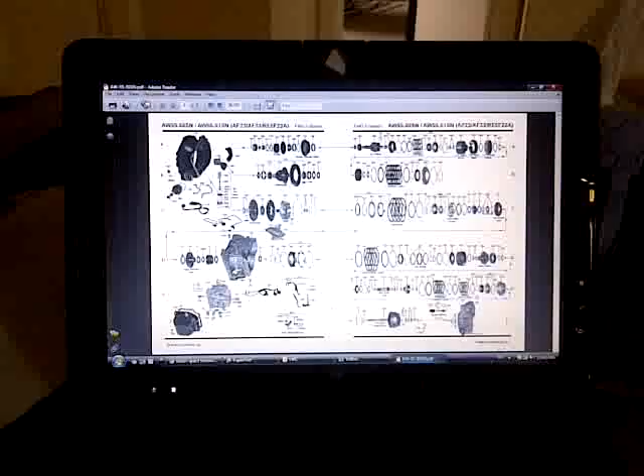This episode series here will be an automotive series. So anyways,

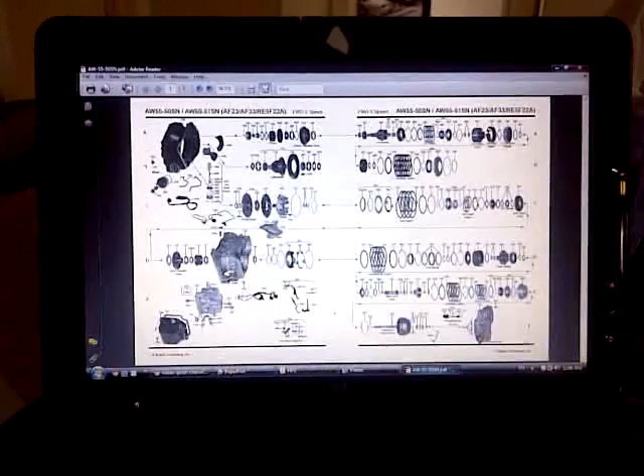Working on the minivan with the good old code reader I got. It turns out that one of the solenoids has gone bad here, and so I found this wonderful company here. They provide a diagram of the transmission here, and also offer selling the solenoid itself instead of the whole valve body, which costs a lot of money.

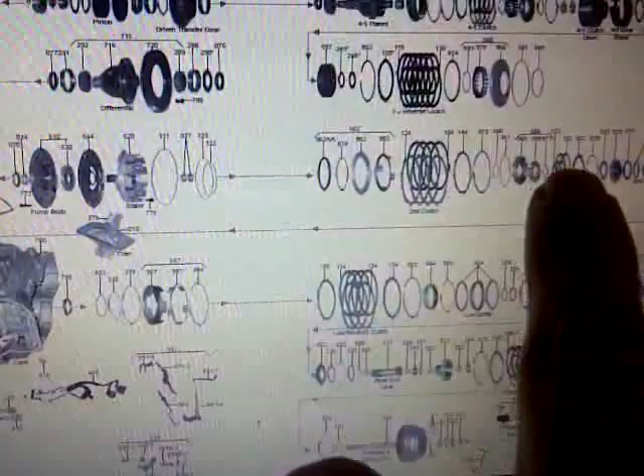And thanks to this, I found out where the transmission filter is. That's the transmission filter right there. And according to this diagram, the way it goes in, it looks like it goes somewhere inside this, within the body of the transmission. So that's probably why I don't see a lot of people replacing their filters on here.

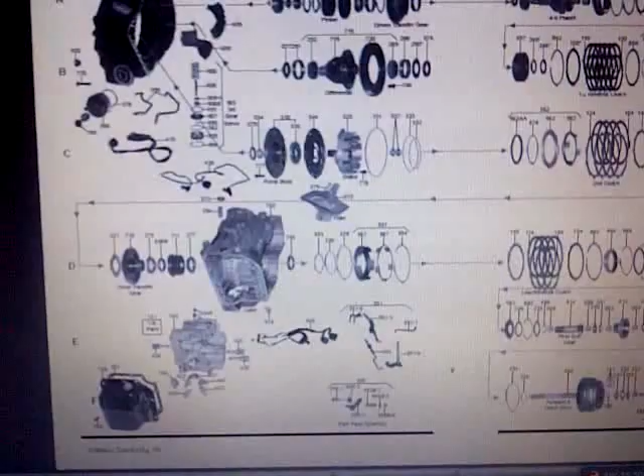Anyways, there's a solenoid right there. Mine's number 410, I think, 440. And I'm just replacing that one. I might have to replace all of them, but I'm just gonna give this a shot and see how it goes.

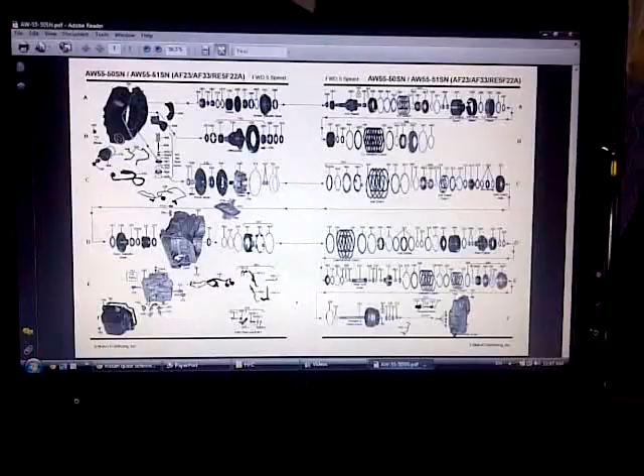Hopefully it'll start driving. And I did find the camshaft, or the crankshaft position sensor. It doesn't say anywhere where it is, but I'll show you when I get down there. Anyways, let's take a crack at it, shall we?

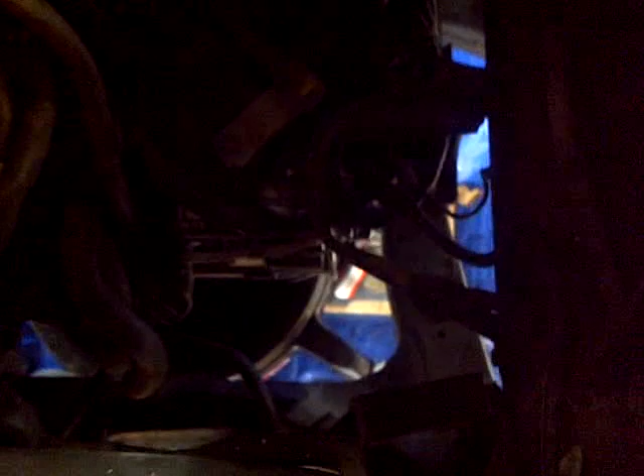All right, here we are again, back in the garage, and of course, let's see if I can illuminate things here. Okay, took the cover off the valve body cover. There's the guts and everything. Of course, took out the batteries and everything.

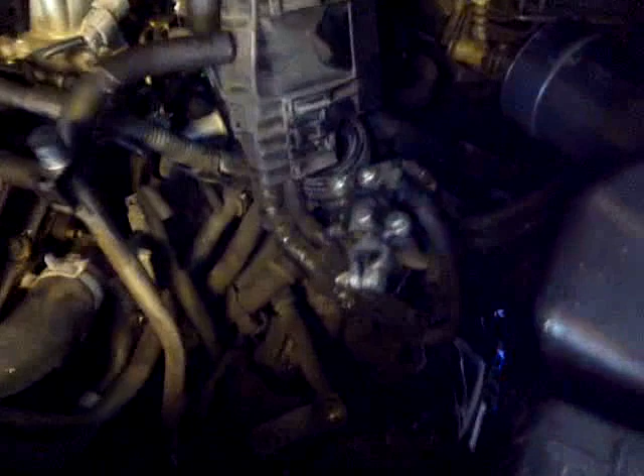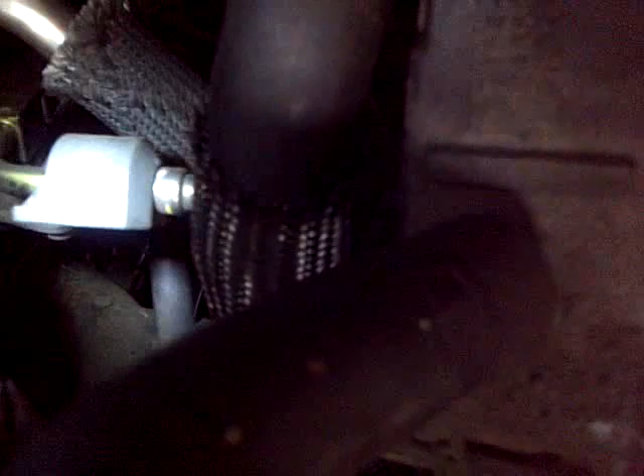And man, I was pulling my hair last night trying to find the sensors. That little green, you see that green out? That's the cam sensor, one on the left side, and there's another one. Let me see if I can find it. There it is, if you can see that little green, it's hard to see. That's the other cam sensor. You see that little green plastic piece. So I found the cam sensors.

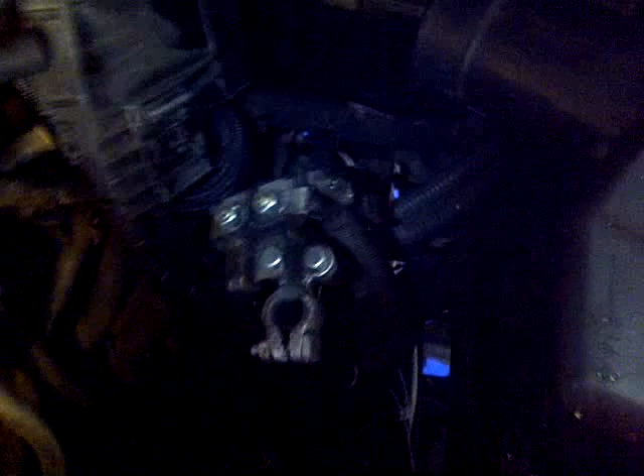They're on top, but man, I had the hardest time finding the crankshaft position sensor. I was digging through back here thinking it was back here somewhere, but eventually what I decided to do was just follow all the wires, where they all go. It's an electronic sensor, so it's got to be connected electronically anyway. So I kind of followed the wires around, and none of the plugs look like the sensor that I've seen pictures of, other than, and of course the crankshaft sensor would most likely be on the bottom.

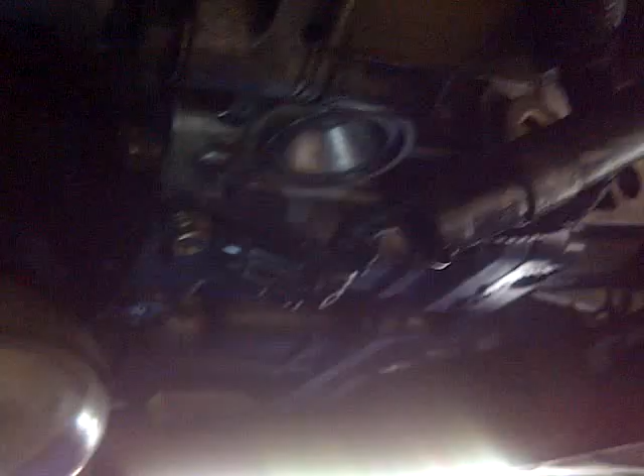And I think I found it. I believe that right there would be the sensor. I unplugged it, I haven't taken it out, but I unplugged it, and it has the right amount of pins. It's the right shape. It's on the bottom, where, of course, the crankshaft would most likely be, or part of the crankshaft. So this made the most sense. So I just concluded that this is the sensor right here, and so there it is.

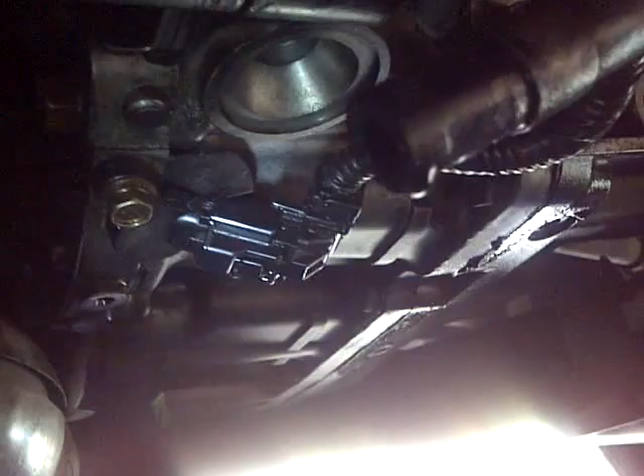And it was covered, you know, it wasn't covered that much. It was covered by this thing here, and it was just a bolt in a hole. That's all it was. Let's see if I can - I'm getting my hands dirty. Oh no, yeah, it was covered like this. So that's how it was covered. It was covered like that.

So I'm hoping that that is the sensor. It makes sense. I mean, I just tried to look at the wiring of this whole thing, and it's got to be wired somehow. I looked at the front over here, and nothing made sense, and that's the only one that makes sense.

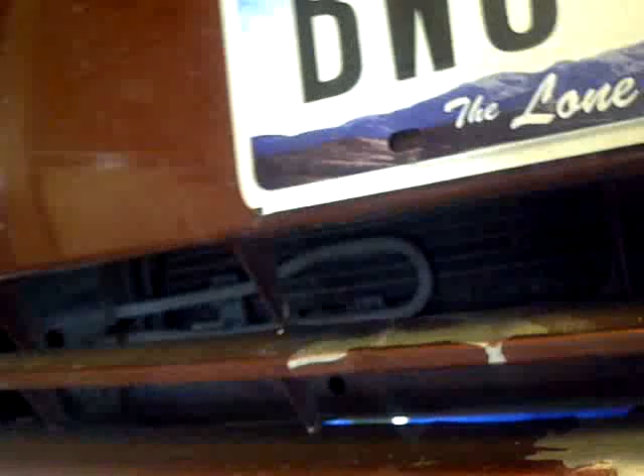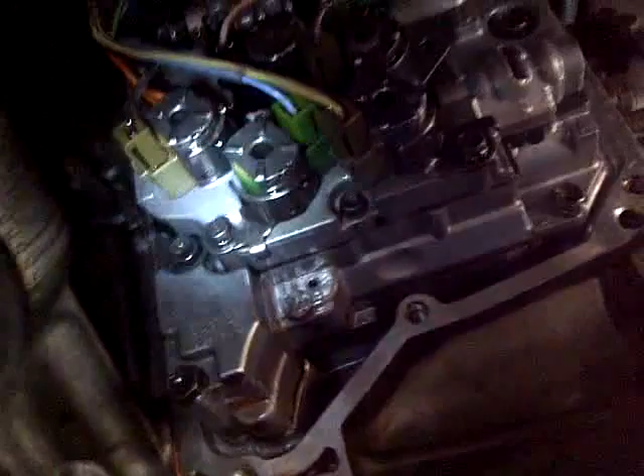Anyways, let's see here. What I got. Okay. So there it is, and it's this one in particular. This one right here, that's the one in particular. Let's see.

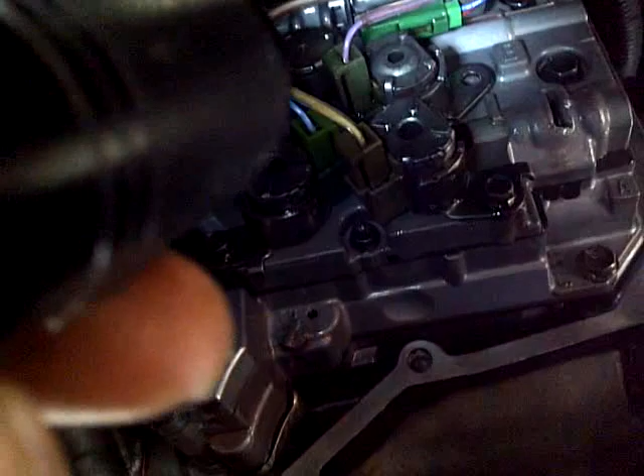And I've already unscrewed it and took out the wiring, or pulled the wiring out. Just kind of put it back just to show you what position it's in, and it's just a simple bolt. As you can see, I already took it out. There you go, there it is.

And I might have to replace all of the solenoids, but hopefully I don't really have to. But considering the other option was to buy the whole valve body just for one bad solenoid, it's kind of ridiculous. But I'll try to take it out here to show you. There it is. So I'm not sure what's wrong with it per se.

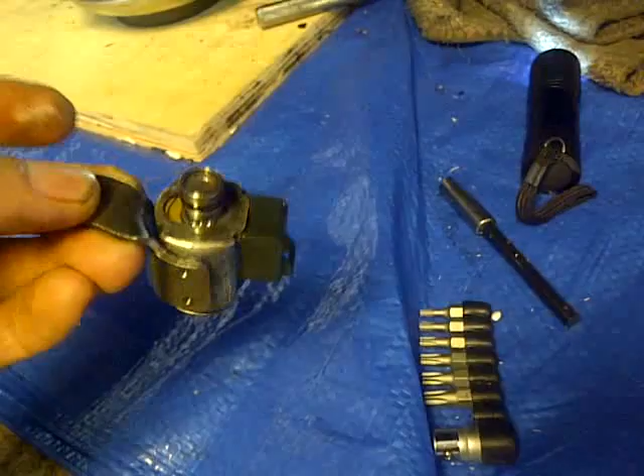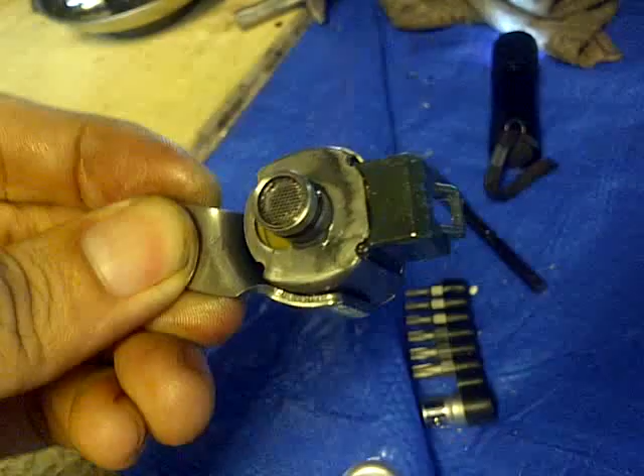But I did notice that there is a filter of some sort right here. It's almost identical, same size. And this is the replacement part, which is a little different because, if I noticed here, there's no filter in here. I don't know if that's going to make a difference, but it looks like you simply plug it back on, plug the electronics back onto it, and bolt it right back on. Hopefully this will get the transmission going again.

Of course, this is just a little, you know, with shipping and everything, it's just $40. It's worth a shot instead of paying a couple thousand dollars or $500 or $600 for a new transmission. I'll give this a shot. So it seems to be relatively easy to do.

And then of course go ahead and also replace the sensor while I'm down here. Already drained out the transmission fluid, which is alright. I'll just have to put more back in, but we'll give that a shot and see how it works. So, oh man, what a day. Oh, and you've seen my little repair tap onto this here. Hopefully I'll keep you all up to date and see how it goes. Thanks.

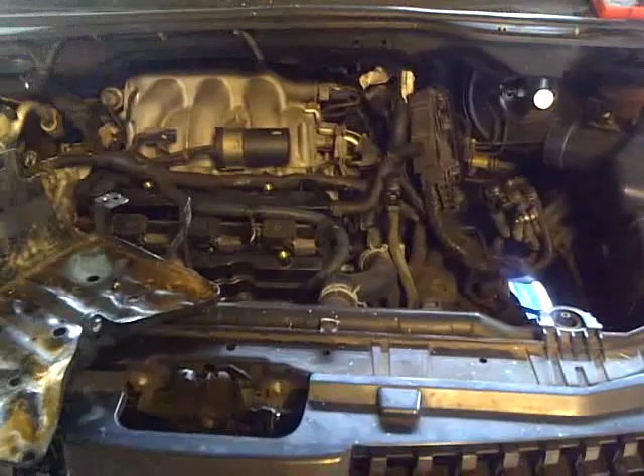Alright everyone, it was a really simple, easy step to put in the new solenoid. As you can see, the new one right there compared to the older one here. Hopefully this will remedy the situation for now. I might have to go ahead and replace all of them. If one's gone bad, they seem to all go bad, but we'll see how it goes. I just want to see how it does before I put any more money into this thing. I might just have to get a whole new transmission. Anyways, hopefully not, because they're kind of expensive.

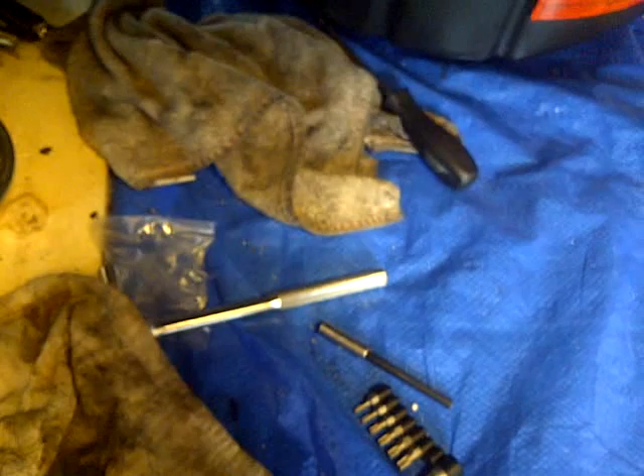Yeah, it just goes right back in. You plug in the electronics, the wiring, put the bolt back on, and it just goes right in the hole. So we'll see how it performs now. Of course, I still gotta- where is it? Oh yeah, right there. There it is. I still gotta change the sensor here, so not quite done yet. Gotta go to the store and get that, probably get some more transmission fluid as well. So there's the update. Oh boy, thanks a lot everyone, keep you all posted.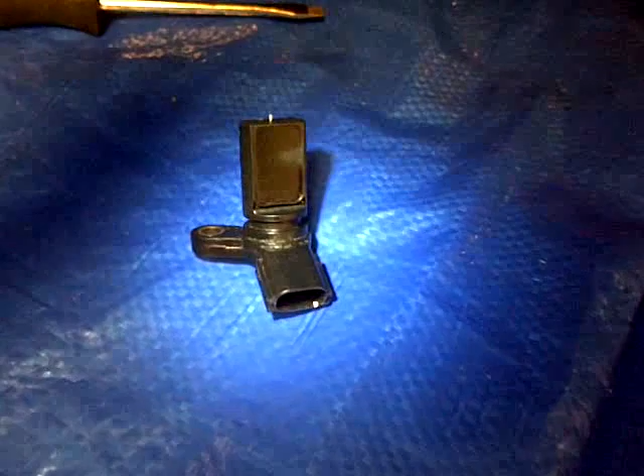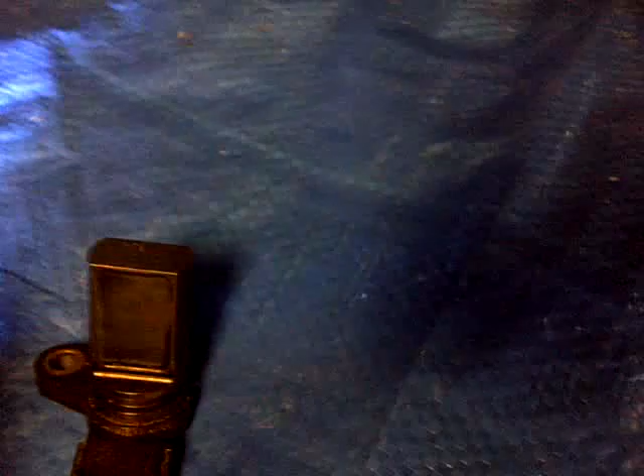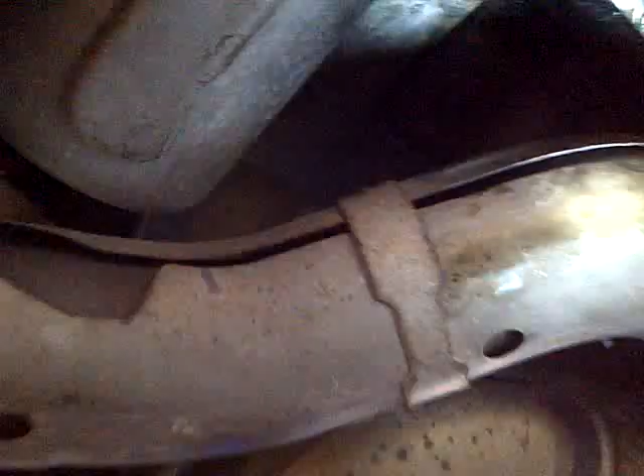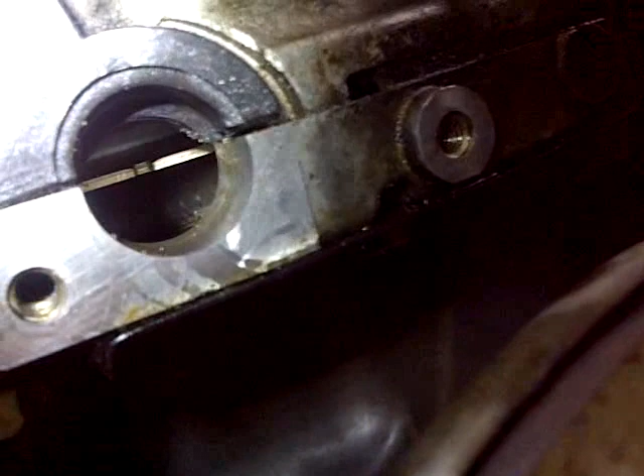Alright everyone, I'm back here, and that's what I pulled out here. Looks like the right part, as far as I'm concerned. There's the 3 pins here, and let's see if I can show you where it came out of here. Right there, that's the hole right there. And you know, it looks like the right spot. I wonder if I could actually see the crankshaft from here. Oh yeah, I guess I can. I can see something, here I'll show you. Y'all can see that. I'm not sure if y'all can. There we go. And you can see that piece, looks like there's a wheel, some kind of wheel. So alright, I'm pretty sure that's the crankshaft there.

That's where it should go. So thankfully, it's right here up in the front, in the bottom, basically very close to where the- let me move this out of the way for you. Very close to the transmission plug. It's right there. So I've been having a hard time finding where this is. It's not like it's readily available, this information, so I had to follow all the wires. But anyways, let's go back to this thing here.

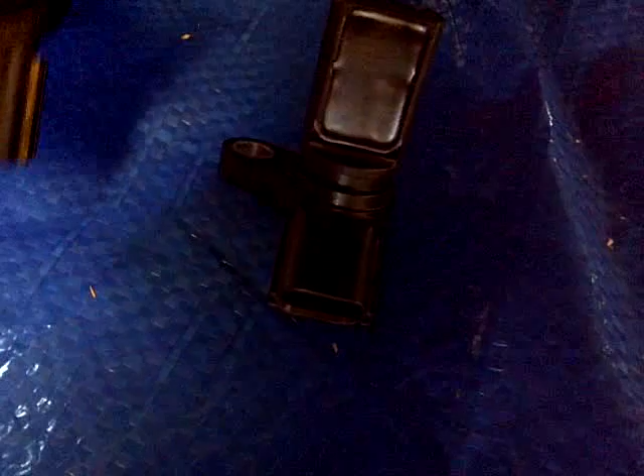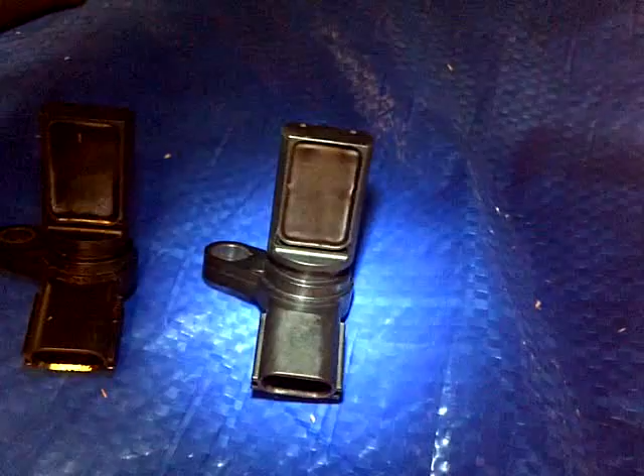So that's what I pulled out, and then here's the new one. This is the new one, and here's the old one. So they look like the same part. This is specifically when I looked up for crankshaft position sensor, this is what came up, and this is what I pulled out. So they match, just got to put it back in now. After that, I'm done.

And of course, I already put in the solenoid for this, so let's put it back together. I may do another flush out here. Last time I used this to flush out, but what I'm gonna do this time is let the fluid go in through the cooler and have it come out on this side here - see right there, that's what's dangling. So I'm gonna pull that more out and use that to flush out all the transmission here.

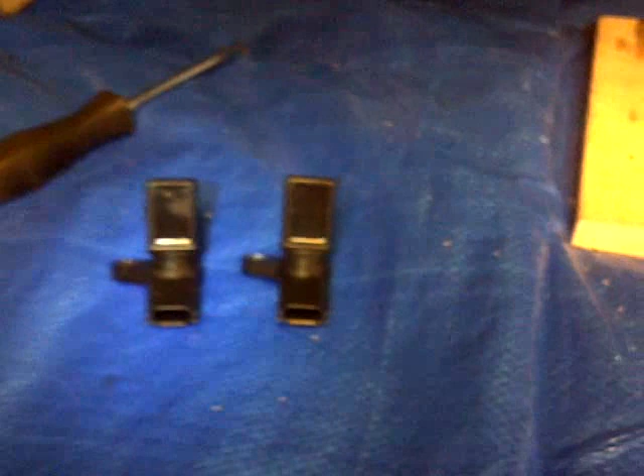Okay, sorry about that, accidentally pushed some buttons here. Basically just flush out anything that might have been - I'm sure there's nothing there by now, but just in case, flush out anything that was in the coolant or in the radiator. So, alright, there we go. I'll get this done and I'll let y'all know how I did. Alright, see ya.

Alright everyone, welcome back, and so far I'm done. Put everything back together, put the intake valve back together, put the battery back, put all the hoses and clamps back, everything that needs to go back where it goes. You know, sometimes I feel like being a mechanic is nothing more than taking things apart and putting it back together. Just got to figure out what you got to take out and what you got to put in. So anyways, that's kind of what it looks like up on top here. On the bottom, let's see here.

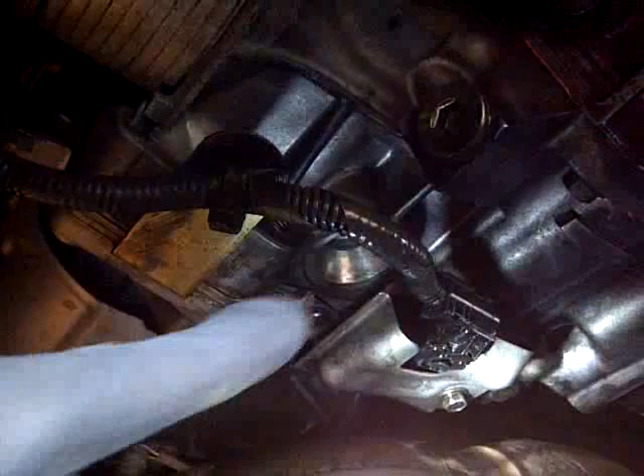I need a flashlight here. There we go. So there's the cover right here, which I believe is where the crankshaft position sensor is. Of course, right next to the drain plug of the transmission fluid. So there it is, I hope.

I hope it works. I'll put the valve body cover back on, and hopefully that will solve any issues I have. I haven't started it yet. Probably need to put some more transmission fluid in since I drained it. So that's kind of what it looks like on the bottom. Just gotta lower everything and clean up, which I pretty much almost did.

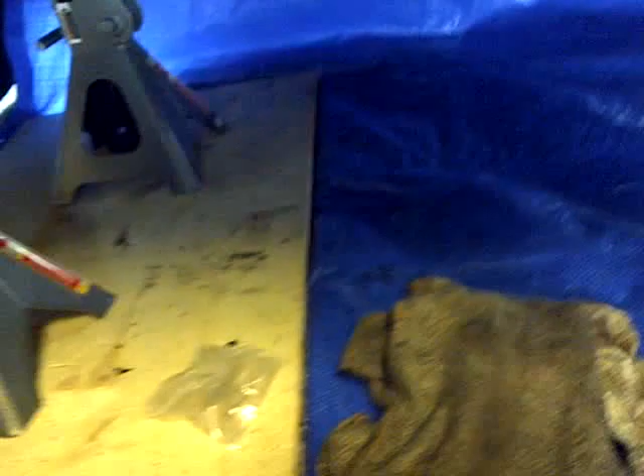And my little slash barbecue pit that I converted into a cart slash welding table, welding cart slash whatever, service cart.

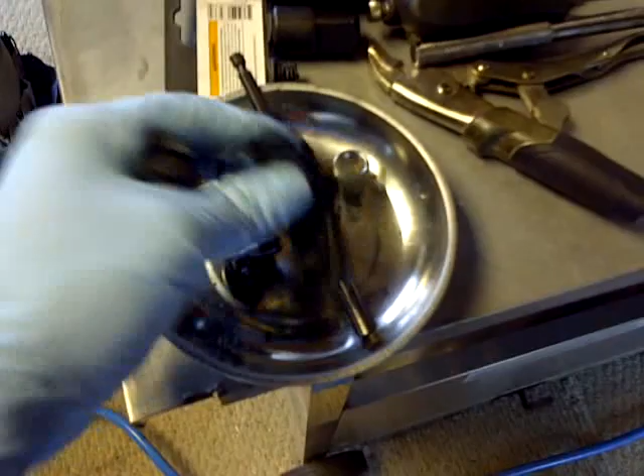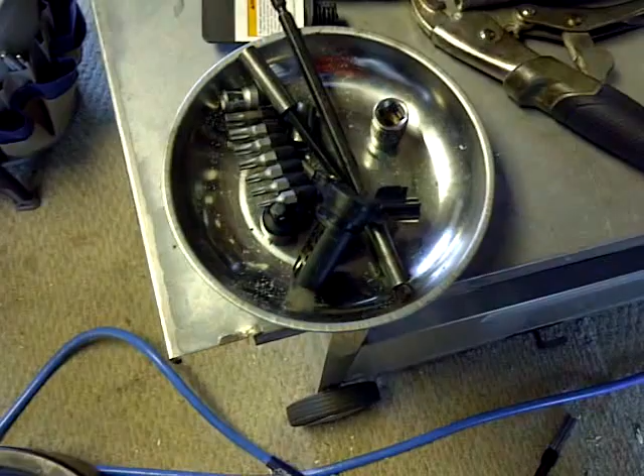So this was the old sensor, and that's pretty much what it looks like. Just like the new one looks just like this. So I hope that this is the right sensor. Let me see here. There we go. Okay, hope that was correct. According to the code reader, this was the problem. So hopefully I won't have to replace this for a very long time.

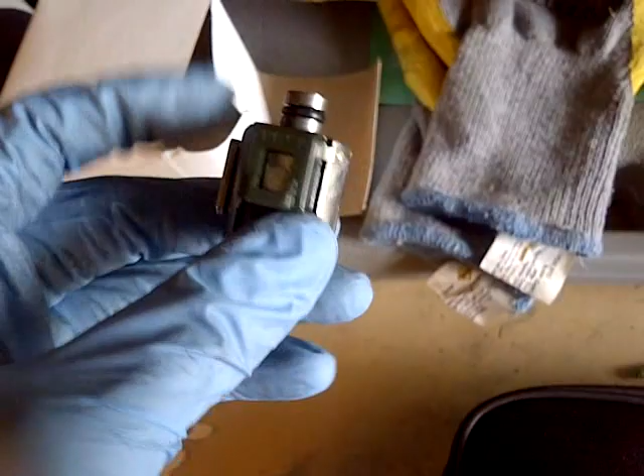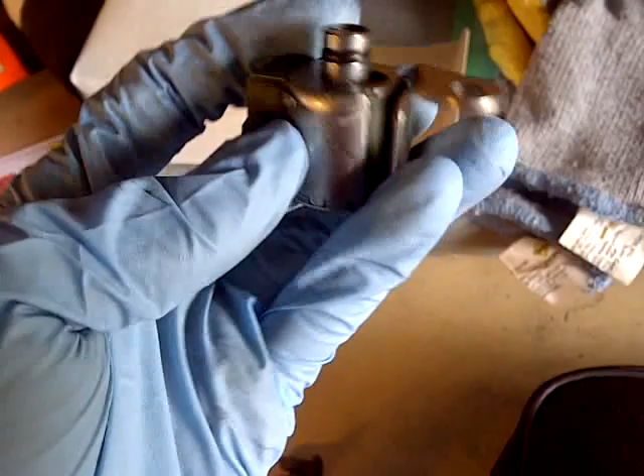And as for the solenoid, here's the old solenoid. Of course I showed you that before, but that's all it is. Kind of amazing, that's all it was. So anyways, hopefully that should solve that problem, maybe. I don't know.

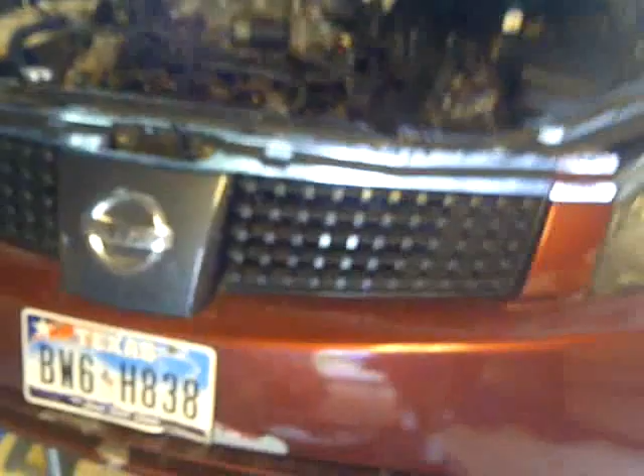I'm just tired of taking it to a mechanic, that's all. If they didn't charge so much I'd take it to them, but since they feel a need to maximize their earnings by excessively charging per customer, I wouldn't have to do this.

Anyways, I'll go and lower it down. Let's see what happens.

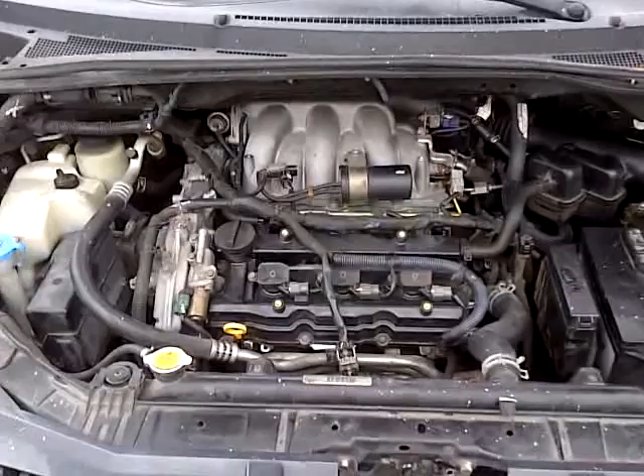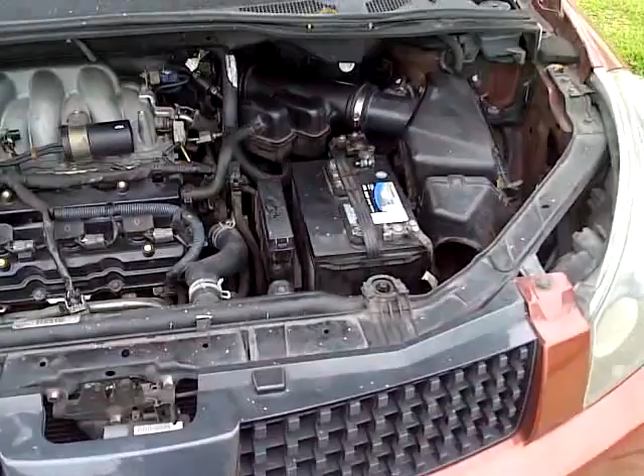Alright everyone, welcome back, and it's working. It's working like a charm. Turned the ignition, it started, it didn't stall anymore. Shifted it in reverse - it used to have a big clank noise when I did that. Now it's quiet on the shifting. Drove it around the block. It shifted, went in gear. Looks like everything is functioning again.

I better take that off before it starts causing me problems. Anyways, man, everything sounds good, looks good. Thank God, everything worked. So let's take a look on the inside here.

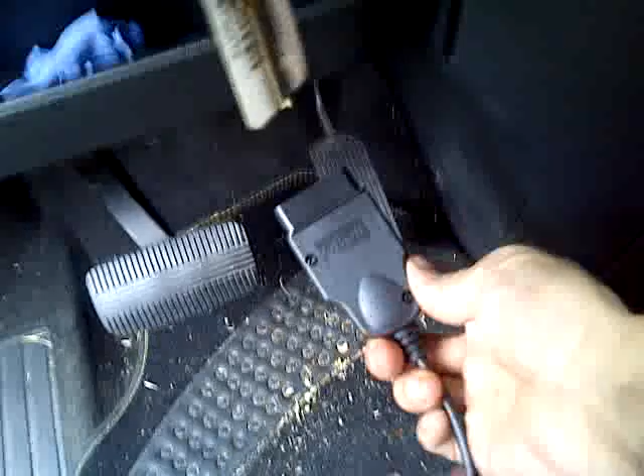Since I pulled the batteries, everything pretty much reset, so there's no engine light. So I'm going to go ahead and just put the - let's see, where is it? There it is, put the - oh, it's right here. Plug that in here. Let's see what - probably won't say anything. But here's a little run on the scanner.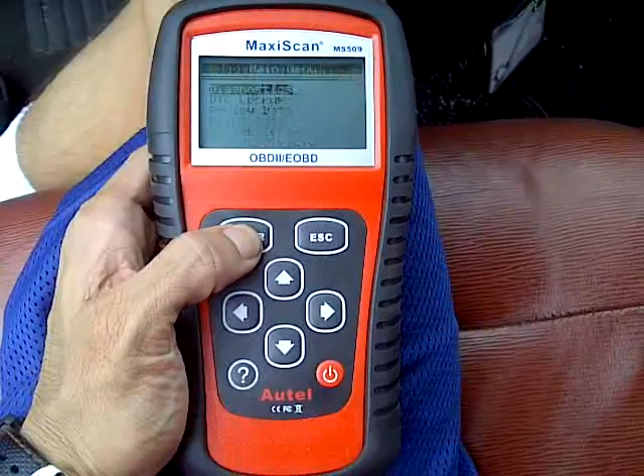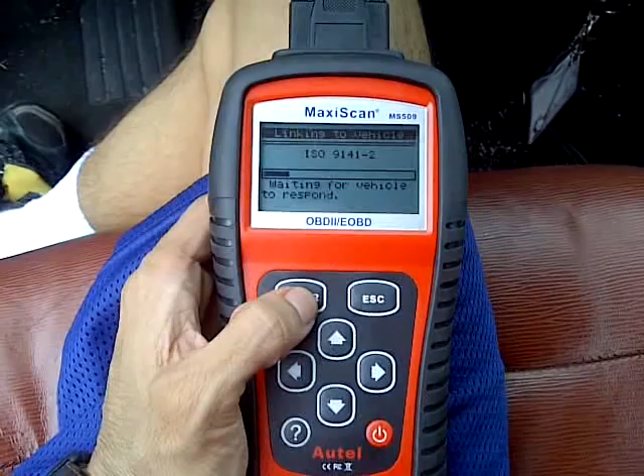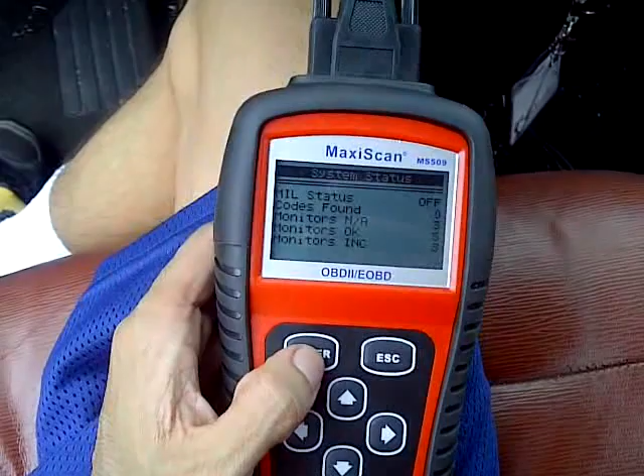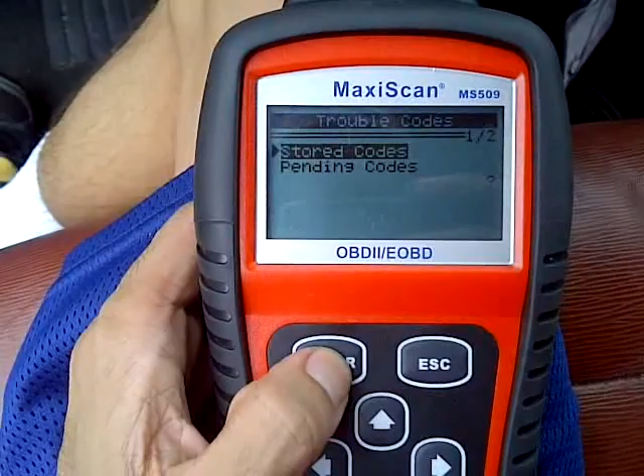Let's do a quick diagnostics on it. Let me see - erase previously stored data to save data from this test. Okay, yeah sure, why not, I'll just say yes. Alright, so of course everything's already been reset, just because of the fact I disconnected the battery. So nothing happened. No codes to read. Okay, and then no pending codes. Alright, no pending codes, cool.

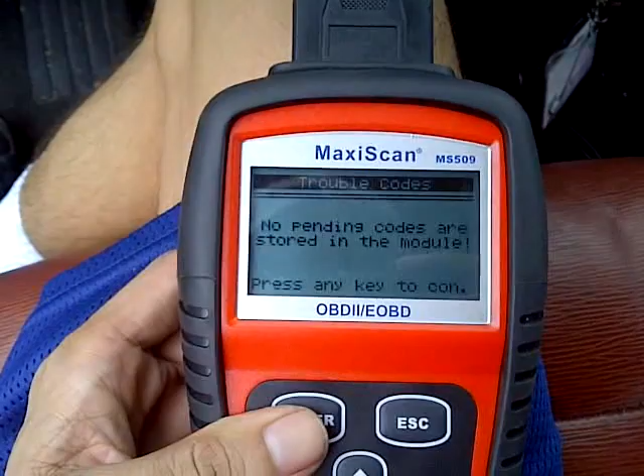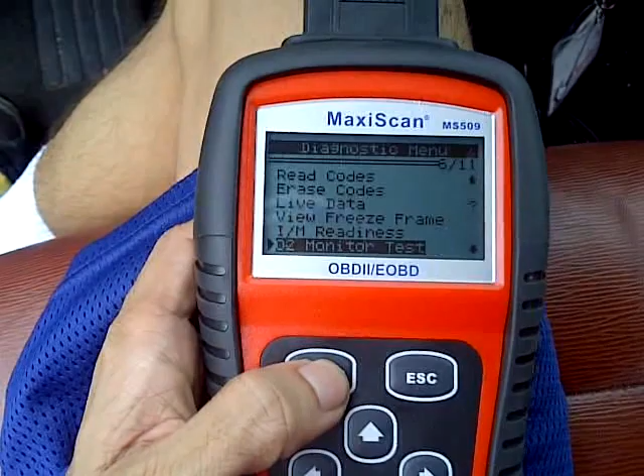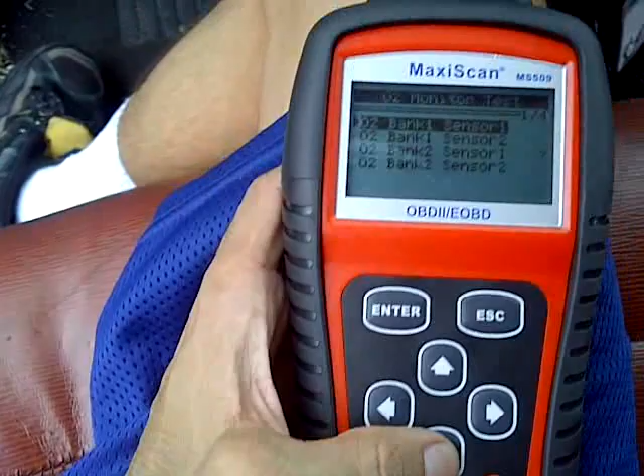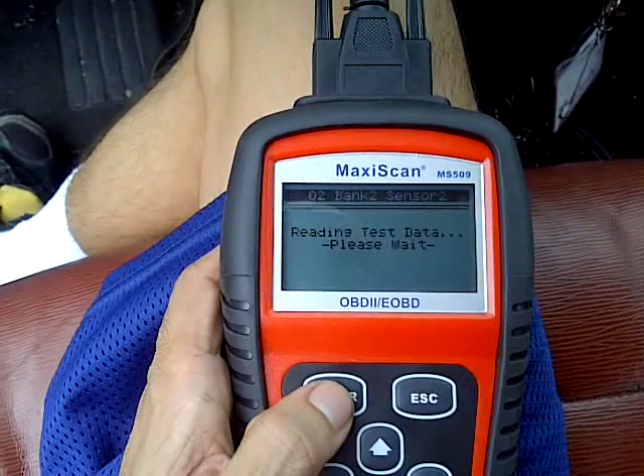So not much to show you here. I'm kind of curious here, O2 monitor test, we'll see what that is. Bank 1, sensor 1, alright we'll just take a look at it real quick. No, it's not supported. Huh. Is there anything supported here? Nope. Nope, I guess nothing's supported.

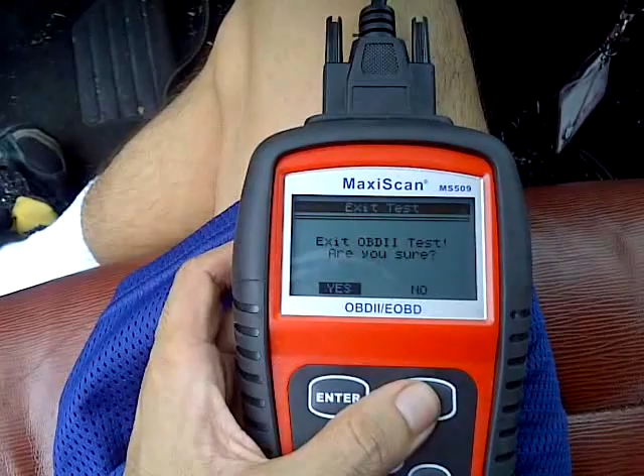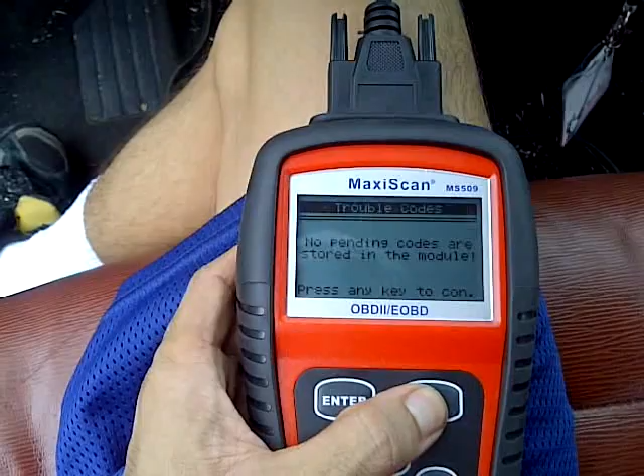Okay, well that makes it fun. Anyways, well nothing's coming up, so hooray. Let me see, review data, stored codes - no codes were stored in the module because I pretty much erased it. Pending codes, nope, I already did this, but nothing's coming up. Okay, alright, so I'm just letting it run, let the transmission fluid run through.

I'm gonna eventually shift the gears here. When I put it in reverse, it used to be a hard clunk, now it's just really quiet. I'm just trying to let the fluid go through each gear. Okay, that worked, great. Okay, that sounds good so far.

Alright, so I guess that one solenoid really prevented the other fluids from going through the other solenoids, and maybe that was the issue, because I know the low gear always worked. Everything else just seemed to stall. So let me turn it off and on, because one of the issues was the crankshaft position sensor was not working, so it always had a hard time starting up here, turning over. So let me try.

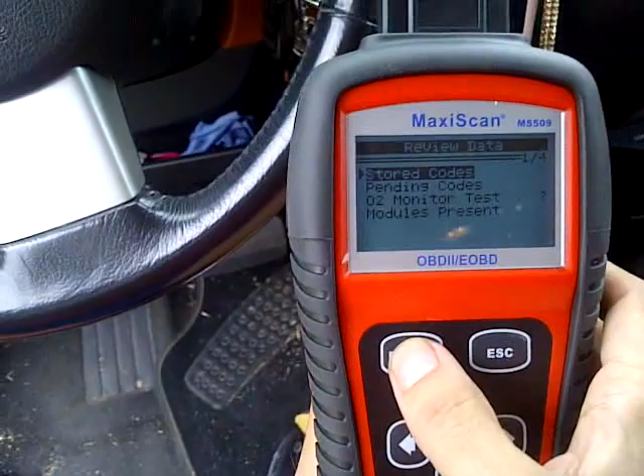Okay, so let's try this. Alright, starts up like a charm without any issues. Alright, cool, it looks like everything's working. No engine service light came on. I'm going to check again for any. Nope.

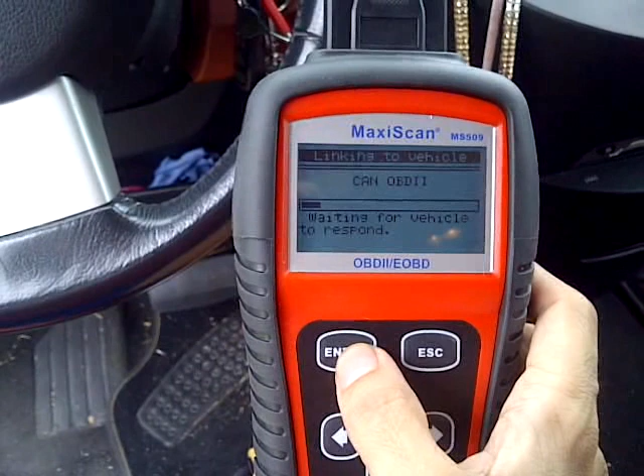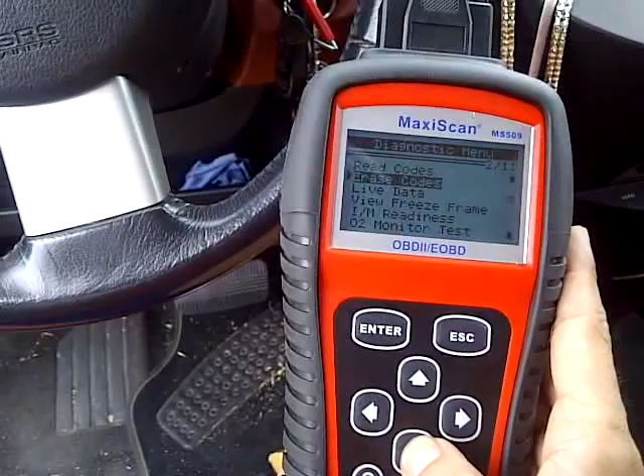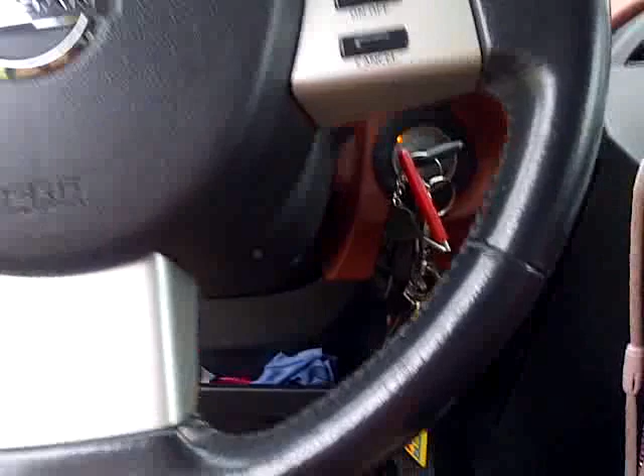Let's put - no. Okay, no codes found. Monitors. Okay. Excellent, yes, I'm done. So, alright, that worked. I'll just go ahead and turn the engine off now.

Put that away. So there you go.

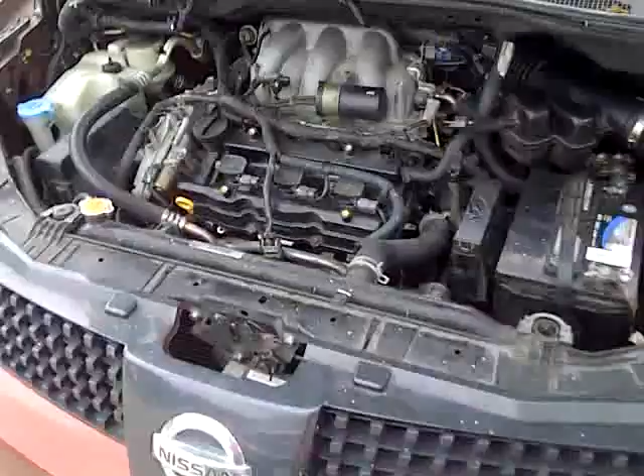If anybody out there has a Nissan Quest, I guess mine's a 2005. If you have anything 2004 and up, I think you probably have the same engine as mine. If you're having any solenoid problems or camshaft sensor, position sensor problems, hopefully this will help you out.